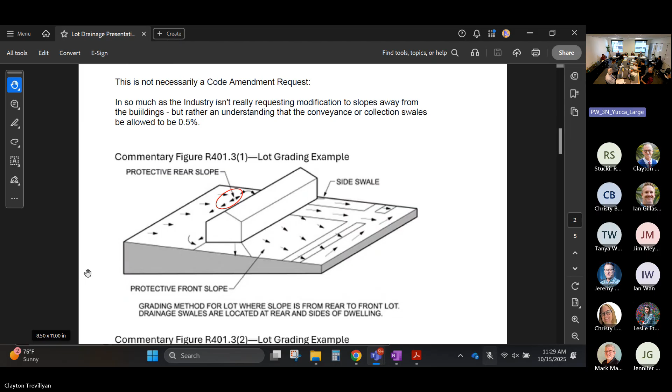If you turn the page, I think before we get too deep into this conversation, I want to identify that I'm not entirely certain that this is a conversation to request a code. As we as an industry have worked through this along with some assistance from some of our building official friends, we think that the conversation is really about addressing the conveyance swales or drainage swales adjacent to and parallel to buildings, not so much about the slope away from them. I think the code really only speaks to minimum slopes away from buildings. So I just want to point that out, that if we find in this conversation there is a relevant code amendment possible, that's great. But if not, I greatly appreciate feedback and input as to what the committee concerns may be.

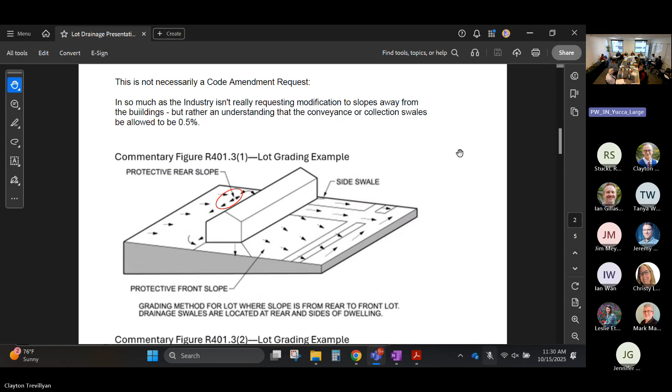I pass these out so you can look at these at your leisure, and I want to be expedient with time. So I'm going to ask to turn the page again. And we'll go to the historical practices. The details at the top of the sheet that I'm showing you are typical lot grading details that are reflected on a set of civil engineering plans. Not so much on a house building plan. Instead on a mass grading site, wherein what the accepted practice has been for 20 years in every jurisdiction has been to show that there is a possibility to provide 1% swales from the farthest corner of a lot to the point of outlet to a street or a drainage way or something.

To be perfectly honest, I do not know. I've been in this town developing for forever and a day. I do not know where that 1% came from. I do believe that the historical practice of 1% is part of why the city got the 1% exception allowed in their UDC. I think the 1% became a standard norm before the city adopted that, but I can't be certain on that. What's of interest is that in the greater Phoenix MSA, these very similar details are permitted to be shown on civil engineering plans at 0.5%.

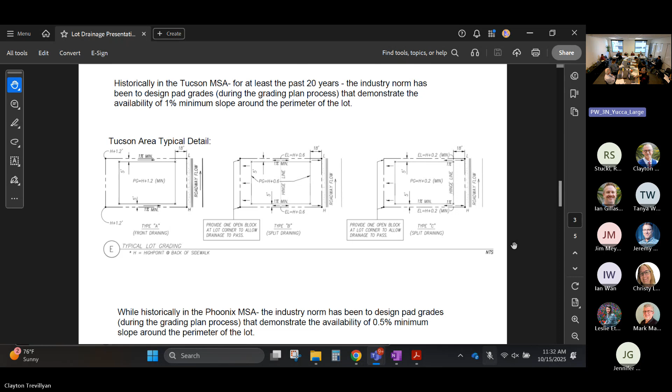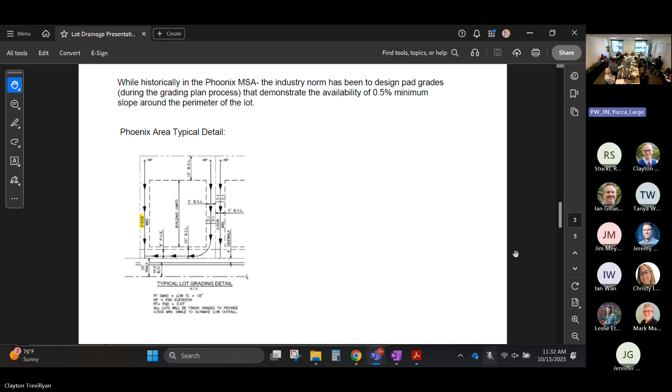Now, to just add a little context to that, showing the opportunity for a 1% or a 0.5% slope is really the basis of how the pad elevation gets established, and ultimately the finished floor elevation gets established, unless there's some other reason for the finished floor to be established at a certain elevation, like an adjacent floodplain. But for on-lot drainage, it's about establishing a minimum pad height to provide that opportunity to get the water off the lot. Again, going fast for the purpose of allowing room for discussion, and I know you've already been here for a long time. Turn the page again.

I'll beg forgiveness for my crude sketches. I am not an artist, and I could not employ my staff to do this because this is volunteer work for me.

So one of the concerns about the 1% minimum is in standard practice with, say, a production build lot where we have 5-foot side yards. We'll have a 45-foot wide lot, a 35-foot wide product with 5-foot side yards. And with the depth of the lots being typically in the 120-foot range, we are needing to create an elevation difference between the pad and our sidewalk grade in the range of 1.4 to 1.6 feet. If you'll look at this exhibit that I've shown, I've got an established pad grade creating that 1.4 to 1.6 feet. That's dependent on the actual lot dimensions, but these are typicals.

You put a slab on top of that, and then you try to create that 1% slope. That swale flow line ultimately ends up needing to be considerably lower than the slab elevation as it approaches the front yard. And for ease of conversation, we're just talking about front draining lots. But a similar situation happens with rear draining lots.

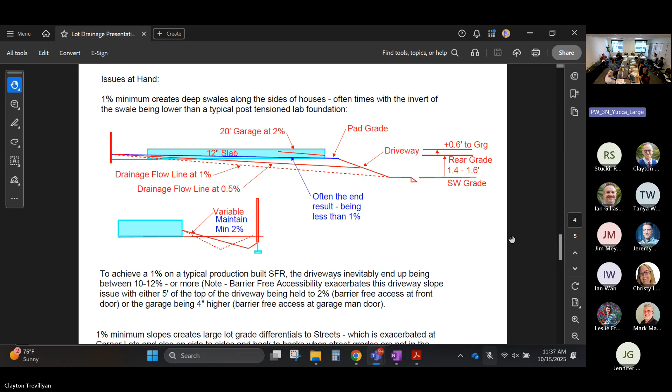I suppose I could offer the opportunity to ask questions, but if you'll bear with me, I've just got a few more minutes and then I'll go to questions.

Bottom half of this page, we really start talking about not so much what this 1% does to on-lot situations, but instead what it does on a larger effect to a production-built subdivision. The 1% creates substantial grade differentials between the pad and the streets, and also substantial differences between the pad and adjacent pads, whether it be side to side or rear to rear.

I've drawn a little cross section here showing kind of a corner lot situation. You've got a blue rectangle representing the slab, your typical 5-foot side yard with a small swale, the side property line of a lot with a wall on it, and then you need to make up this grade adjustment down to the sidewalk.

And if that grade adjustment is more than a foot, which it always is with 1% slopes, you either need to allow for a common area so you can have a slope, which translates into wasted space, less utilization of the land, less affordable housing, or you have to build a retaining wall.

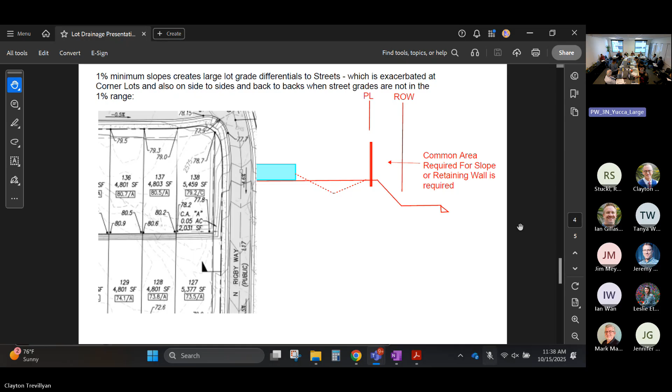On back-to-backs, I've got an example, a snip from a typical grading plan where you can see the effect of back-to-back lots. If you looked at lots 136 to 129, you have almost 6.5 feet of delta between those two lots. Now it's relative to the terrain that you're building on, but even in the flattest scenarios, you're going to have 1 to 2 feet of differential on your back-to-back lots.

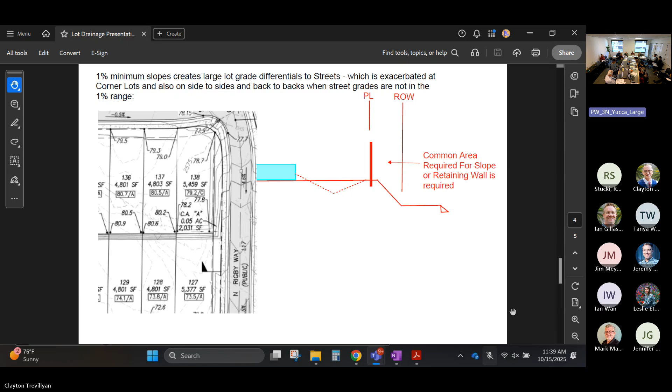So in summary, we just wanted to address a couple of opportunities that we identified. When it comes to cost and affordability, we see that a potential change to a half a percent minimum slope allows us to keep all of our pads closer to a 0.8 to 1 foot differential to our streets rather than the 1.6 to 1.8 differential. That in itself reduces grading costs, and has the effect of eliminating retaining walls and riprap slopes.

Not every lot benefits from that, but if you said that would benefit 1 out of every 8 lots and would save about $4,000, all of a sudden you're looking at a $500 savings per lot. If you look at just the change relative to cost of grading, say half a foot to 0.8 of a foot change in grading saves about 120 cubic yards of earth moving. Typical earth moving costs at $3.50 a cubic yard equates to another $420 per lot savings.

And then lastly, and this is the big ticket one, it seems in today's current environment and the parcels we're building on, almost every project ends up being an import project where we have to haul dirt in, and we're having to haul this dirt in to elevate pads relative to street grades. If we were to lower all of our pads by half a foot, not changing streets, just changing pads, we're cutting out 120 cubic yards of import on a typical import project at $20 per cubic yard, saving about $2,400.

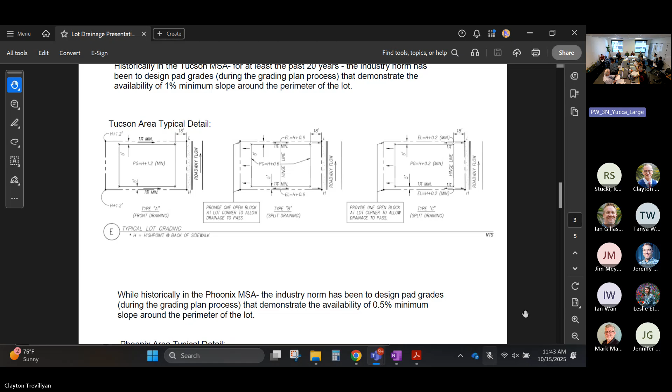All too often, that 1% is not even met. We're going to just straight up acknowledge that, because we don't have good mechanisms to require a validation of the drainage. One of the suggestions that has been thought of is perhaps we have a third-party certification requirement as part of building final. It would obviously need to be certified before decomposed granite was installed in the yard, because rock can hide the imperfections in the grading.

There would be some training required. Several of the builders in town do already have these third-party inspections being done, not as a requirement, but as a best practice. And we know that if this were a plausible path, there would need to be some additional training of the professional industry on how to certify these.

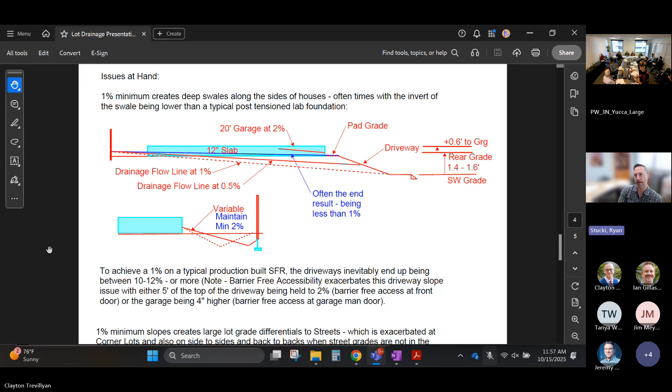I think part of the issue that we've discussed is that the pad grade is what's set on that 1% going to the back of the lot, but then the slab, the FFE, ends up being as much as 12 inches higher than that. And it seems like if we dissociate the pad grade from the grading rule, it could help to solve the driveway issues. If we have the FFE set at a minimum rather than the pad grade, I think part of the issue here is these pad grades are set based on that elevation.

And just going back to that diagram that John was showing, it already creates a steep driveway, and then you add the 12 inches for the slab, so the FFE is 12 inches higher than that, and it exacerbates the issue, but it doesn't help with the drainage on the side. The 1% or 0.5% swale going around the lot, it's basically independent at that point because that pad grade's already set, and you could drop that entire slab a foot and it wouldn't affect the drainage around the house. All it affects is that driveway slope.

So I'd love to see some changes to how the pad grade is set and maybe reference the FFE instead of the pad grade as the minimum on the lot, because I think that would help a lot with the driveway slopes, which I think is the crux of this issue, and what we're all trying to solve is these steep driveways and allow for lower elevations on those. Interesting. Commercial projects, you said, you tell them what the finished floor elevation is, right? Yeah. But not on subdivision.

If you go look at, again, Greg from Sunbelt, if you go and look at a subdivision after we grade it, and before we get any builders in there to go vertical, the lots are graded typically flat. And then each builder has their own little preference on the detail that they like to have, but they establish a hinge point and then it drops down, and then typically there's a swale in front, which goes back up to the curb. So initially, we have stormwater pollution prevention and kind of a swale behind a curb so that water stays and that soil stays back there. But it's a flat graded pad.